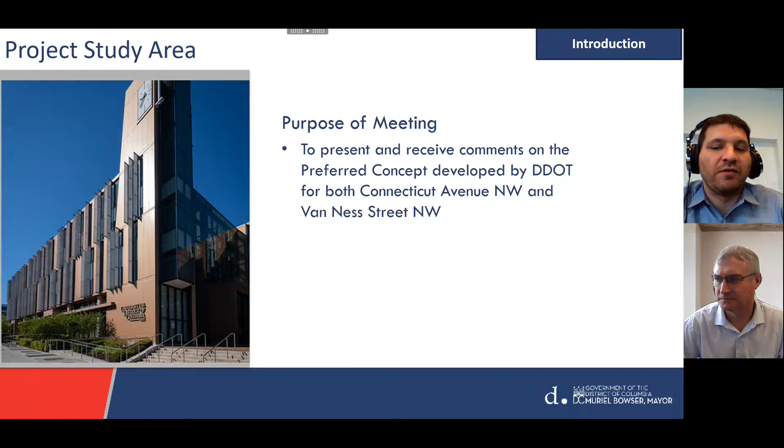Our goals and objectives for the project: this is our project study area. It's Connecticut Avenue between Van Ness Street and Albemarle Street. For Connecticut Avenue, it is not the roadway - the roadway is covered in the Connecticut Avenue Reversible Lane project, which continues both north and south of our study area. For Connecticut Avenue, we're just concerned with the area between the curb line and the property line, which often is the building face - so the sidewalks, the tree boxes, the areas in front of buildings that are landscaped, or in some cases paved over with concrete or brick.

Also included in our project is Windom Place Northwest on both sides of Connecticut Avenue, and Windom Place on the east side is a key link to the Soapstone Valley Park. And then Van Ness Street between Connecticut Avenue and Reno Road. For Windom and Van Ness Street, the project includes both the sidewalk area but also the roadway for both Windom and Van Ness. So that's a difference from Connecticut, where the roadway itself is not part of this project.

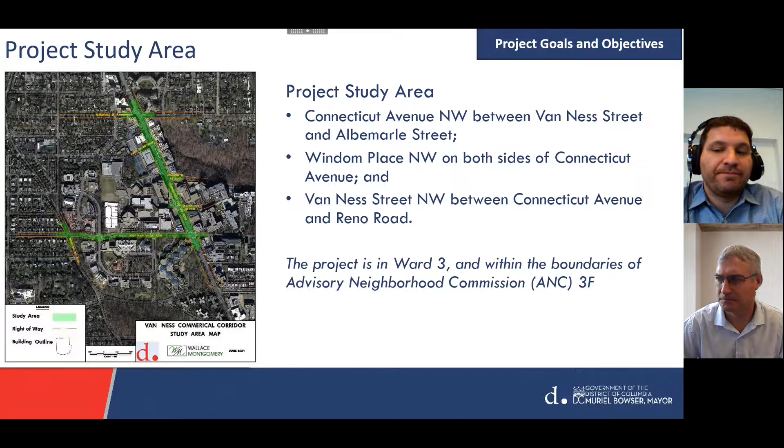Our goals for the project are to develop a concept plan that promotes multimodal transportation safety and creates community-friendly spaces along the project area. We'll be presenting a concept plan that embraces the positive qualities of the commercial corridor and incorporates involvement and comments from community members, residents, and other stakeholders. And then we'll be setting a path forward for future phases of the project, which will cover final design and construction.

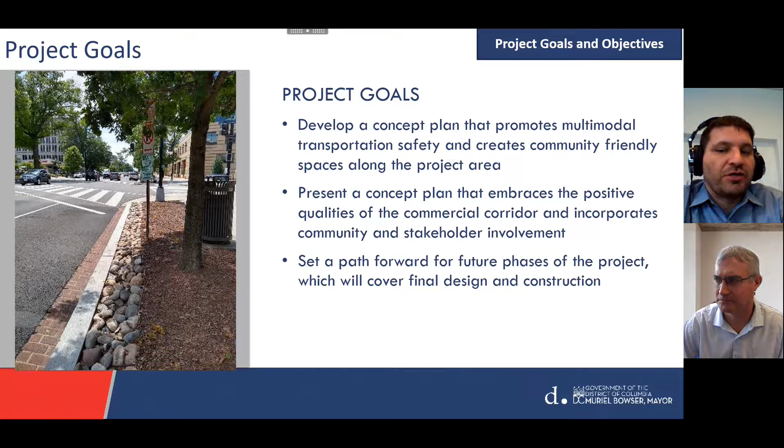Part of that is providing a detailed cost estimate, which will be helpful for the future phases of the project, which we'll discuss in a little bit. The objective of the project is to propose improvements to the streetscape in the Van Ness Commercial District to promote multimodal transportation safety and create community-friendly public spaces along the project area.

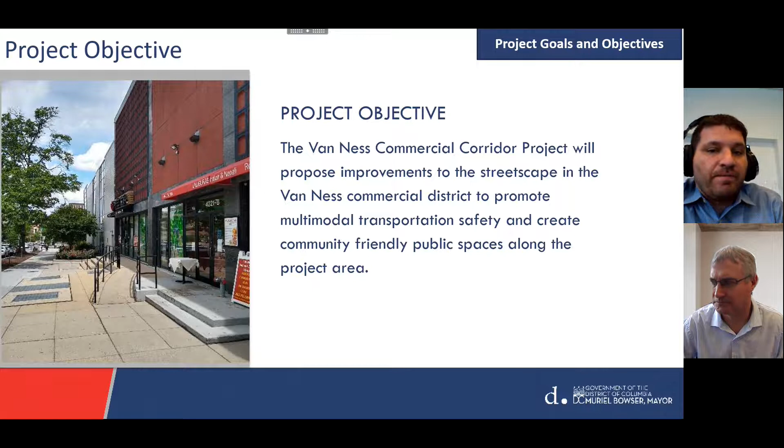The schedule of the project: this has been a 12-month project. We started in June 2021 with project scoping, and then we had our first public meeting at the end of June 2021 where we introduced the project to the public. Throughout the summer, we did data collection and analysis. In October 2021, we had a design charrette and another public meeting where we showed our draft concept and got comments from the public. Since that meeting, we've been further refining the concept.

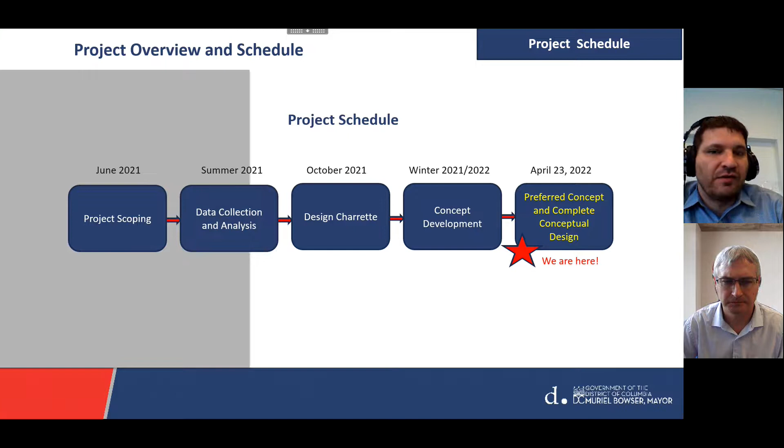Today we are presenting the preferred concept, which we'll be sharing as part of this presentation. We'll also be providing it on our webpage, and that will be available to you anytime. Our project will wrap in June when we will take any comments we hear from this, and anything we incorporate from that will be included in the final concept, completing the concept design phase of this project. And I will turn it over to Ray to go through the concept in more detail.

Thank you, Ted. As part of the concept development phase, we basically broke the project into the following segments to present it better to you: looking at Connecticut Avenue from Albemarle to Yuma, from Yuma to Windom, from Windom to Veazey, and from Veazey to Van Ness—so 4 segments, the 4-block area.

We also include, as Ted mentioned, Windom Place on both sides of Connecticut Avenue, shown within the concept plans for the first 4 segments. Along Van Ness, we actually have 2 plans: the area from Connecticut Avenue to International Drive, and the section from International Drive to Reno Road. We'll go through that as part of the preferred concept mapping you'll see in a moment.

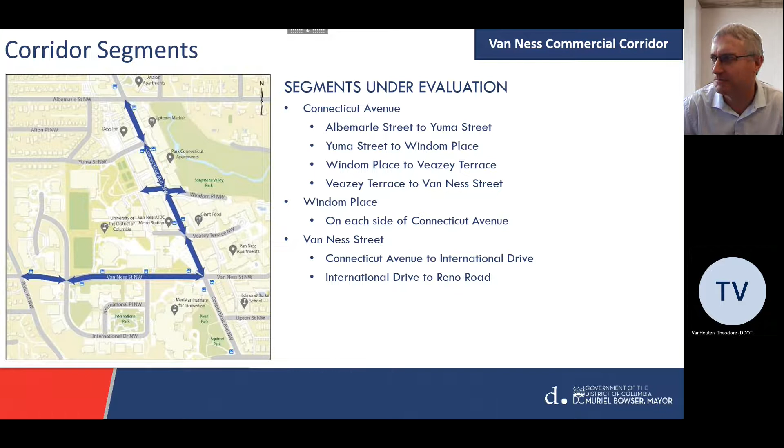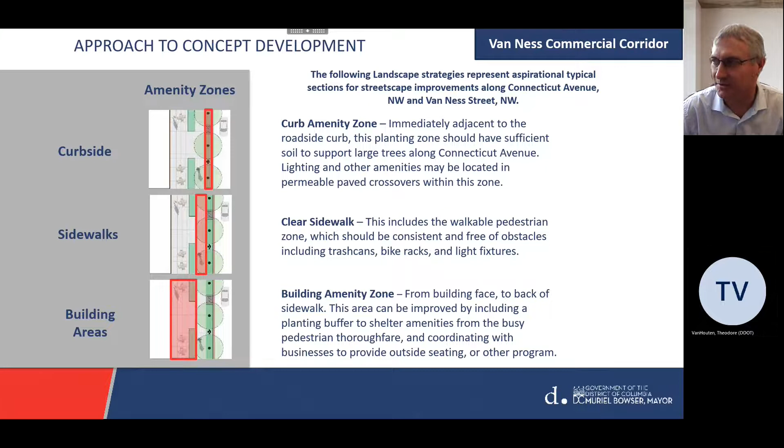Just to remind everyone of the approach we've been undertaking—this is some information we presented back in October as we worked through this during the charrette phase. We're looking to have 3 amenity zones: the curb amenity zone right next to the roadway, the section for a clear sidewalk, trying to maintain at least 10 feet for the entire width, and the building amenity zone that sits between the sidewalk and the different businesses, residents, etc. along the area. That's the approach we've taken with this concept development.

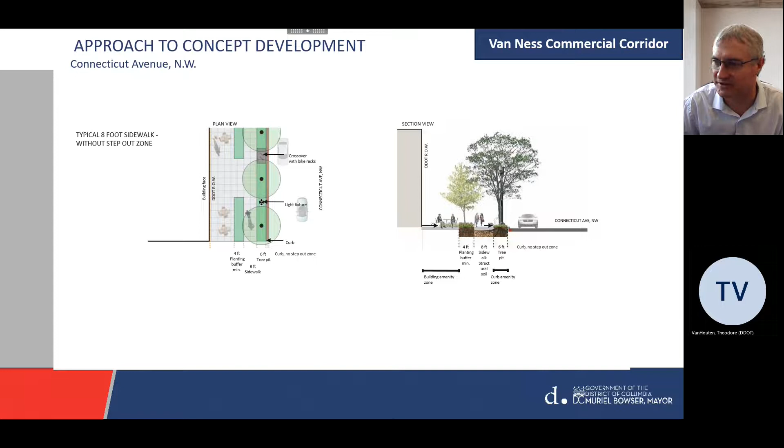The materials we're looking at along Connecticut Avenue try to match a lot of what was done in front of UDC, having consistency throughout: concrete pavers for the sidewalk area, and brick pavers for pedestrian crossover areas to cross into the street between the tree pits. We're looking to have consistency with the trash receptacles, replacing any older lighting with the twin globes that have been installed in many locations along the corridor, as well as the same streetlight masting. For anything back by the building amenity zone, we'd keep that stainless steel finish for the access, and of course put in standard bike racks and others with the standard black matte material.

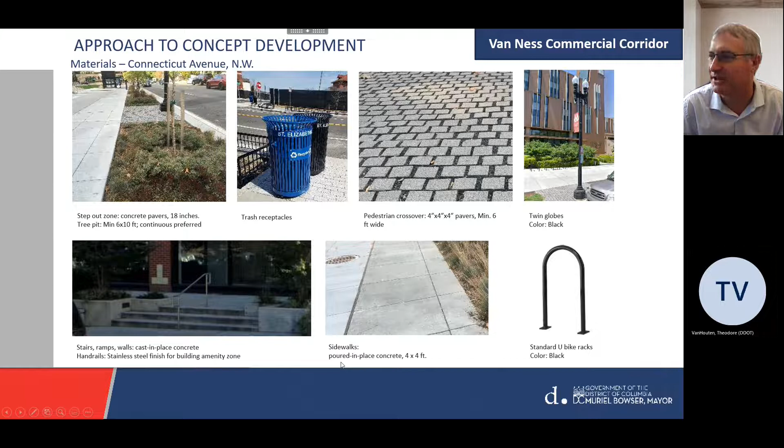Along Van Ness, something new that wasn't shown during the design charrette but came out of that was the consideration for a two-way cycle track on the south side by the embassy side along Van Ness, keeping parking and access to the UDC side on the north. This typical section shows that with the sidewalk and the cycle track, and we'll show that concept in more detail in a second with the plan view.

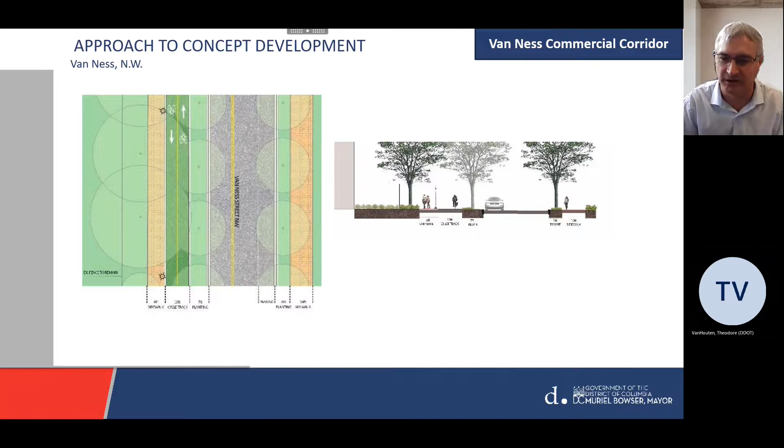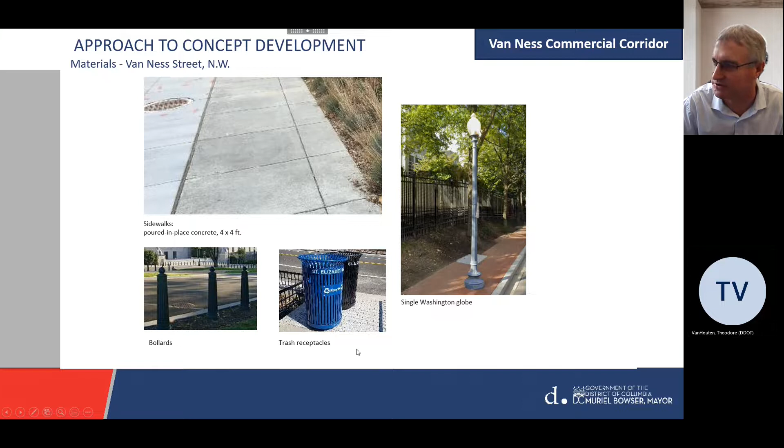We're also looking at the concrete amenity for the sidewalk there, but we'd only have single globe light posts to be consistent with what's along that section. We are looking at some bollards for protection areas along the embassy area, and of course consistency with any receptacles or anything placed within the area.

To walk through the preferred concept, we're going to start at the north of the study area—this is Albemarle going south along Connecticut Avenue. What you see here: anything dashed is basically in place today. Anything solid, like the sidewalk, would be a new planting area, or the sidewalk going across driveways—things we're looking to add to enhance the corridor and have consistency along it.

In this stretch, we're keeping a lot of the plantings, but we're only able to get an 8-foot sidewalk along this west side until just past the entrance of the Days Inn. We are looking to add in some planter boxes—there's a lot of good plantings on the north side—and putting the pedestrian walkway across the driveways so the pedestrian emphasis is there from a safety standpoint, making drivers aware they're crossing a pedestrian area.

Adding in a few more planting areas, and we're continuing that up along Yuma Street, on both sides of Yuma, up to the alleyway with that concept. On the east side, putting in a couple separated planter boxes for seating areas in front of the restaurants, having the 10-foot sidewalk, and we're looking to potentially relocate the bus stop that's set back in the sidewalk to be a curb-facing stop, consistent with the rest of the Connecticut Avenue corridor. A lot of this stays in place though, because Park Van Ness and others already match that theme, and we'd keep that in place for this section of the corridor, but carry the crosswalk across any areas where there might be a driveway crossing.

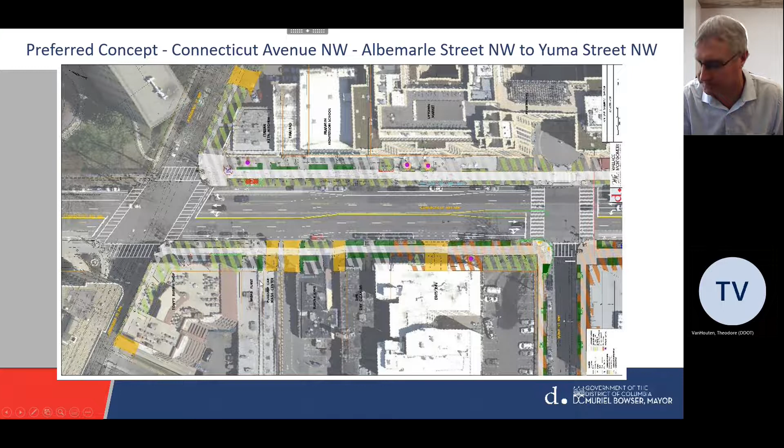Between Yuma and Windom, we are looking at doing a lot of improvements here in front of the UDC Law Building, where we would put the 10-foot sidewalk going through, adding in a lot of planter block areas to separate, but keeping entrance to the businesses open.

Once again, showing that crossing of the driveway, and then doing a little bit of a curb bump out here, sort of to protect the parking area and make it a little more pedestrian friendly for the crossing.

On the east side, we are looking at a little planter box area here, continuing that 10-foot sidewalk and really doing an adjustment to this entrance here, where there's a conflict right now with the delivery or drop-off area and the sidewalk. Many people actually walk through the parking area versus using the sidewalk.

We're looking to expand the sidewalk and make that blend together so that it's sort of shared, but understanding the emphasis on pedestrians versus vehicular access. And then expanding some of the tree boxes as we get closer to the intersection at Windom.

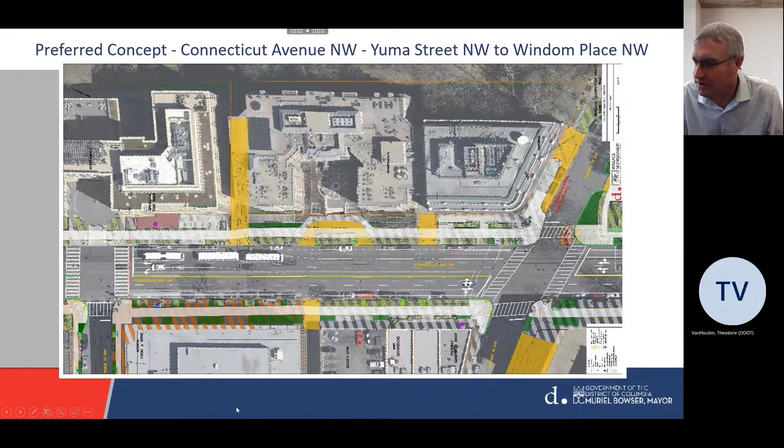I do want to get into that with Windom, but before I do, this shows a rendering of the 10-foot sidewalk with the planter box areas added in front of the law building.

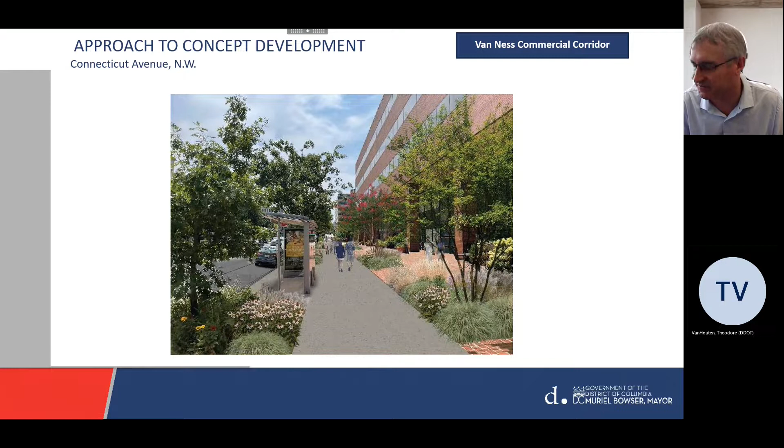One of the things to emphasize is that DDOT will maintain the trees in the tree pit, but any other plantings and other things within these areas would be something we'd work with the community and the businesses to do, as this moves forward in the next phase of design with any agreements or coordination that needs to occur.

When we go from Windom Place down to Veazey, one thing I want to emphasize is these improvements along Windom that we were talking about. This actually is the access to Soapstone Valley Trails and the park.

We really want to formalize this a little more, put in a formal crosswalk, and we're actually moving the ADA access a little further south, so it just improves and makes this more direct access from a pedestrian standpoint.

On the west side here, we're doing the tree boxes, expanding some of those, making this consistent, putting that 10-foot sidewalk area in so it's clear that that's the pedestrian area as we're in front of the metro, with a bit more green space, and just making it a little more consistent with the rest of the corridor.

We also are looking to minimize the width of the entrance here at Veazey Terrace as you enter UDC. We are keeping sort of a driveway apron there, but UDC's master plan calls for this to be more of a pedestrian area and not as vehicle friendly or as wide as it is today.

So trying to reduce that as part of this effort, which minimizes the crosswalk width, both here at Veazey as well as crossing Connecticut Avenue a little bit.

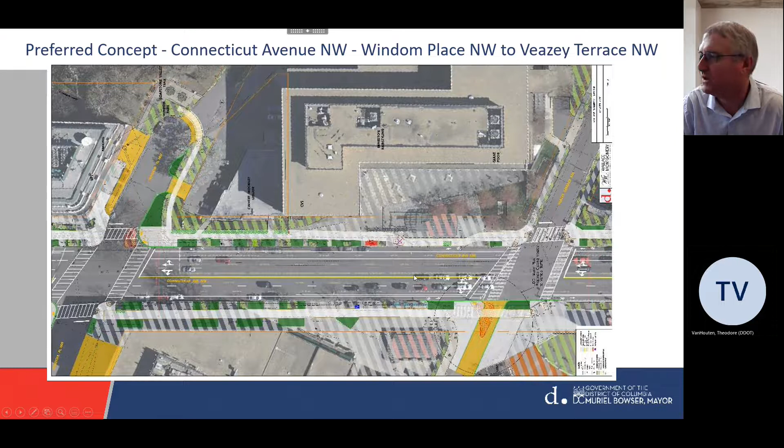And then continuing the rest of the way down to Van Ness, really no improvements along this side. As I mentioned, UDC was sort of a model that was followed for how we want to be addressing this throughout, so we're really looking to apply that theme along those four-block area.

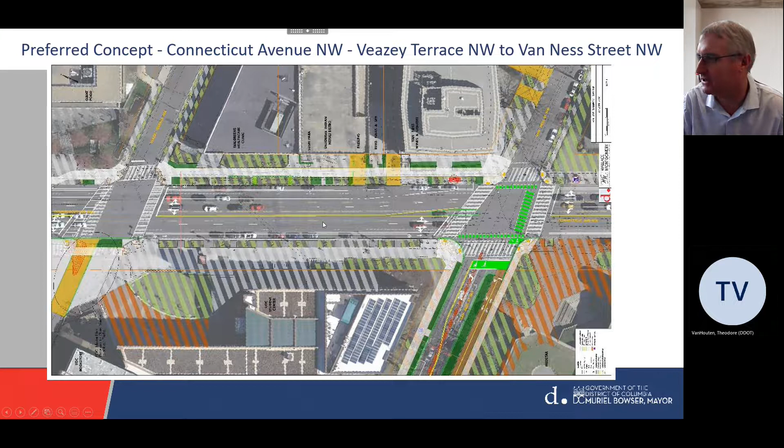And then minor enhancements with some walkthroughs, the sidewalk again going across the driveways and making sure there's that consistency so that we understand that that is the pedestrian focus, and putting our three amenity zones in place. So that shows the concepts that we're looking at along Connecticut Avenue.

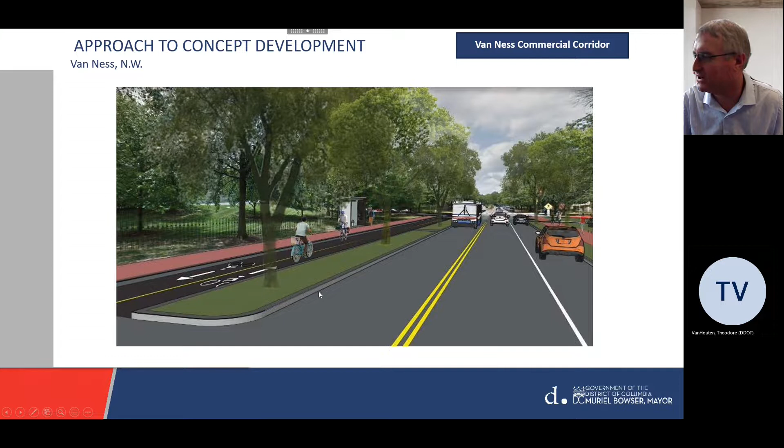And I want to then jump to Van Ness. This is just a quick rendering to give you an idea of what we're proposing with the two-way cycle track, the sidewalk area, and then of course parking next to UDC. This is a concept plan showing that.

So basically what we're proposing under the preferred concept is the removal of the median and the planting median, bringing the roadway to one lane in each direction with parking on the north side next to UDC, having that tree buffer, and then expanding to make sure it's a 10-foot sidewalk. On the side closest to the embassy areas, we're actually showing an 8-foot sidewalk along that entire length. There really aren't any access points.

And then we have the cycle track occurring, continuing that up to the intersection. That gives you an understanding, and of course we'd be putting any markings and matching that with anything done along Connecticut Avenue as part of the reversible lane study.

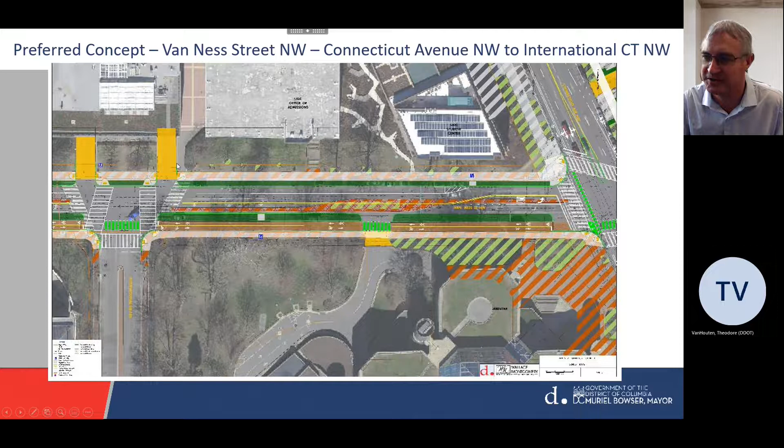We are proposing narrowing and putting the crosswalks into the middle area here with UDC, and UDC is actually looking as part of their master plan at getting this down to one entrance instead of two, so we look to minimize that in the future with coordination with them.

Moving along Van Ness heading west, you see the cycle track continuing here in front of the embassy area, and of course keeping that parking, the buffer area, and the sidewalk along UDC and the elementary school.

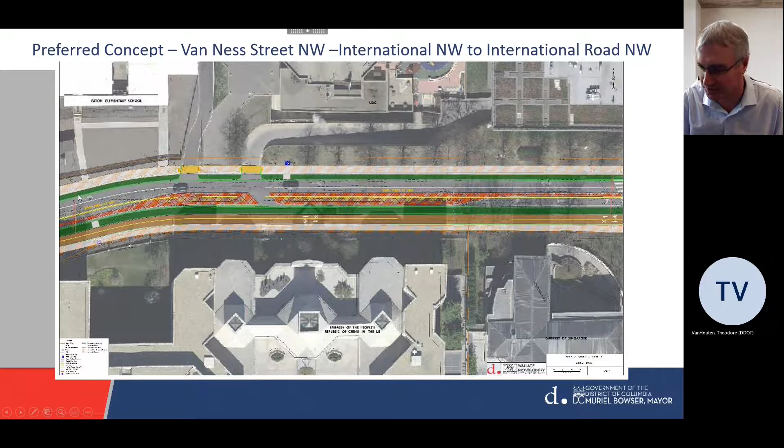And that continues all the way through the intersection with International, and then transitions down to the intersection with Reno.

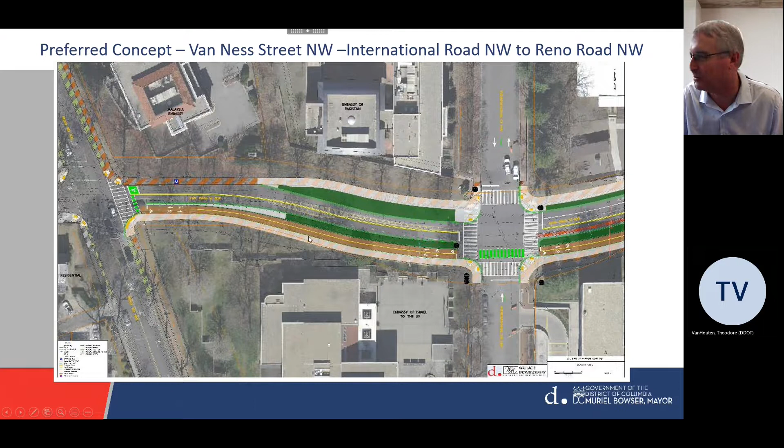The one thing we want to highlight here is this planting area. You may notice today there are some concrete planters out there for extra protection for the Israeli embassy. We are actually proposing bollards along this stretch instead of those planter boxes, so it makes it a little nicer, a little open section, and includes the cycle track on the inside of that crossing, providing a full connection from Reno Road all the way over to Connecticut.

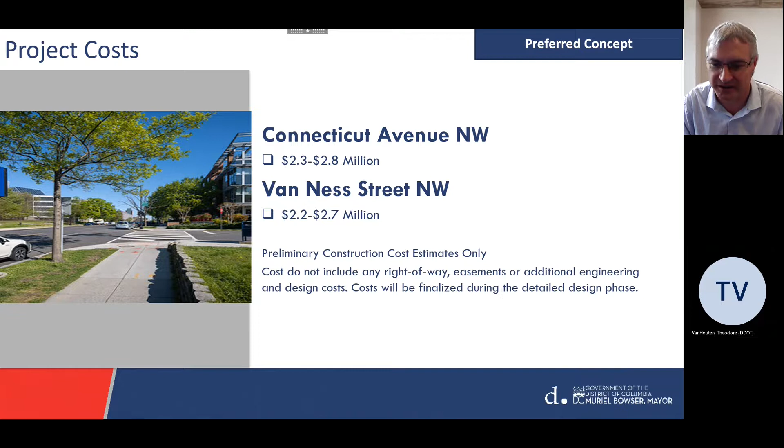From a cost standpoint, we're looking at a range of $2.3 to $2.8 million for Connecticut Avenue. For Van Ness, it's actually very similar in range, even with a little more enhancement, but a smaller project area. These are preliminary costs only, and construction costs only. This does not include any right-of-way or easement information, or any cost for the final design phase prior to being advertised for construction.

That's a quick overview of the concepts. As Ted mentioned, they'll be available on the website for your review, and I'll turn it back to Ted to go through the next steps.

Thanks, Ray. Our next steps are: we have our public meeting on April 23rd, 2022, when we'll be sharing this with the public. Then we'll be refining the preferred concepts based on the comments we heard at that public meeting, as well as from people viewing this presentation who send comments soon after. We also had an interagency group and an advisory committee group, and we'll be including any comments we hear from those that make sense, and refining the preferred concept.

We'll be finalizing cost estimates that Ray just discussed, and preparing environmental documentation under the National Environmental Policy Act. After those are completed, we'll identify potential funding opportunities.

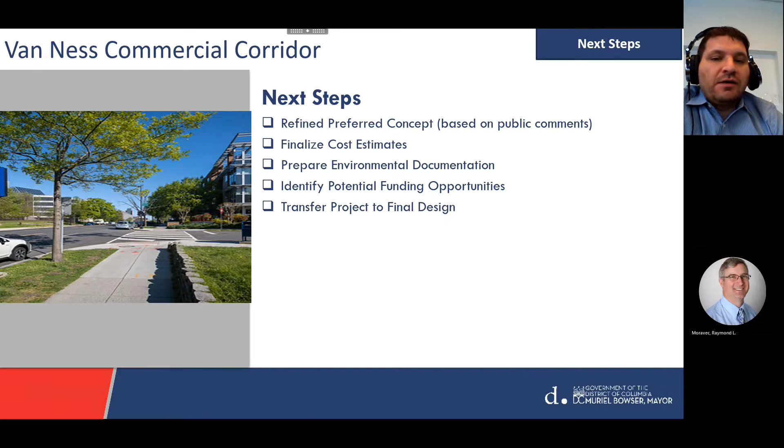This project is federally funded, or future phases of this project are likely to be federally funded, so we are required to provide a Title VI public meeting questionnaire. This captures demographic information of people attending our meetings, and also gives attendees an opportunity to provide comments on our projects.

Those forms come with a 30-day comment period. After the 30-day comment period, we'll be taking everything we get and aggregating the demographic information from the responses.

If you have any other questions, we'll be putting this recording on DDOT's YouTube page, so you could be reviewing it months after we wrap the project, which is fine. You can contact me anytime with comments, questions, or updates on the project, or if you want to be updated, email me and I'll put you on a list, and once we start the next phase we can let you know.